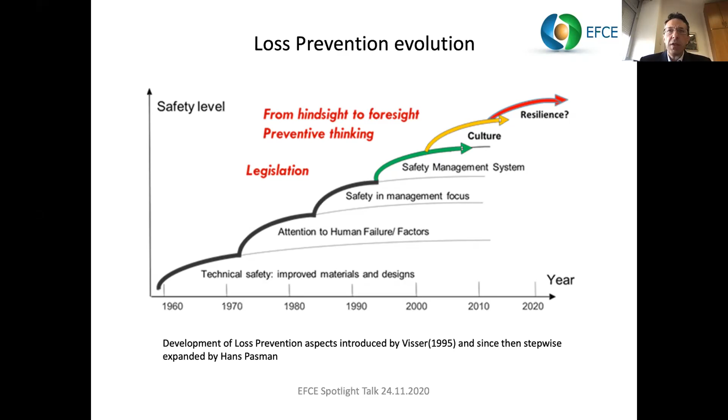This webinar with leading chemical experts focuses on safety, on what we call safety 4.0. Why? We see the fast development of manufacturing, processing, and chain production, which is well known as Industry 4.0, which includes the digital revolution, artificial intelligence, the Internet of Things, and the interaction with every smart device, opening new possibilities of data gathering and processing, applying the tools of artificial intelligence and machine learning.

Accordingly, new approaches are needed, to re-engineer process safety and the way technological risk should be managed towards the newly defined safety 4.0, introduced for the first time at the last EFCE Loss Prevention Symposium organized in Delft by Professor Genserik Reniers.

And from one side, emphasis is about identifying the benefits to the management of major hazards. From the other side, we must ensure that all the hazards of the technology are understood and correctly managed.

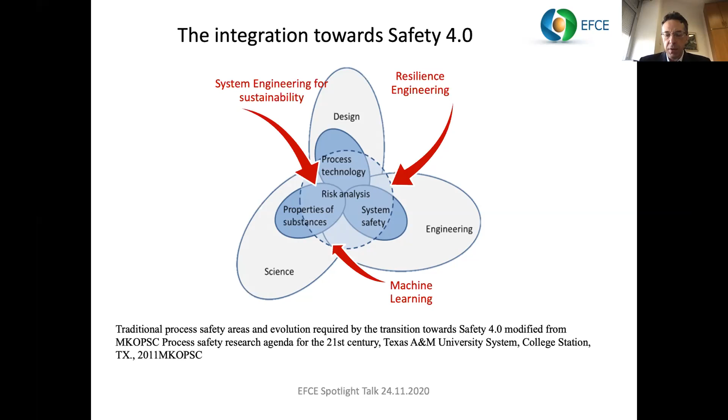On this basis, I mention the next Loss Prevention Working Symposium, which is the 17th of the series, and which will be organized in Prague. Some new topics will be introduced, also taking into account EFCE efforts to transmit the key messages relevant to energy transition, carbon-free and safe sustainable industry.

Here you can see quite fastly the matrix approach showing the new topics, the new challenges posed by the emerging problems, and the traditional topics of our symposium.

And I showed just some expansion of the different topics: risk assessment, security and safety, lessons learned, case studies, human and organizational factors, leadership and risk communication.

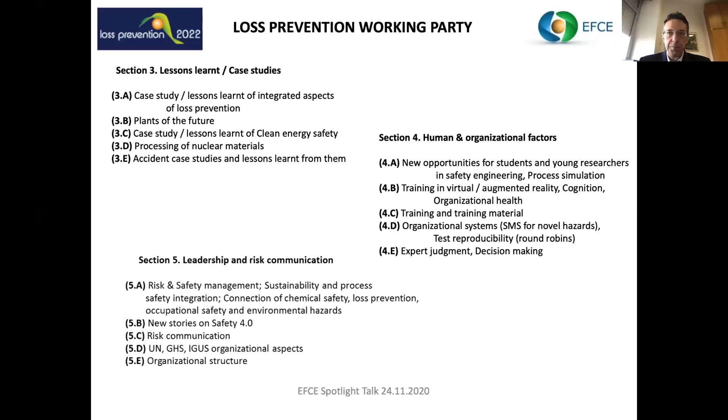But now, after this introduction, it's time to get this webinar off the ground, introducing the first speaker, who is actually a worldwide guru in process safety. I remind the audience that if there are some questions about the lecture, please write them by the electronic system, and we shall discuss them after the lecture.

The first speaker is Professor Hans Pasman, who is a research professor at Mary Kay O'Connor Process Safety Center at Texas A&M University and emeritus professor in chemical risk management of the Delft University of Technology. He investigated several process industry accidents, and his research included reactive materials, dust and energetic materials explosion, risk analysis. Since 1972, he is a member of the Working Party on Loss Prevention and Safety Promotion in the process industry, and is currently always with us.

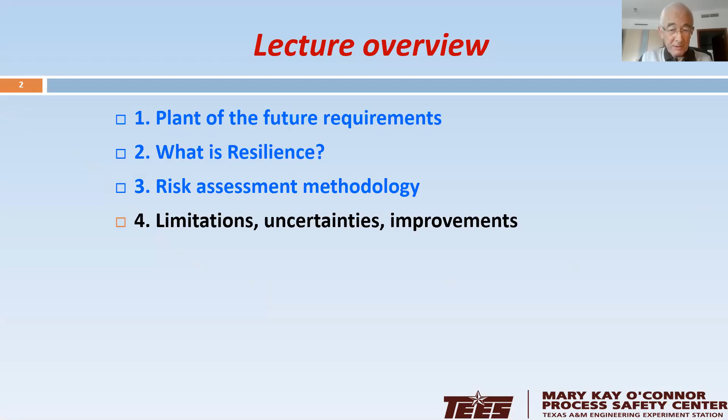The overview of the lecture is as follows: plant of the future requirements, what is resilience, risk assessment methodology (just a quickie), limitations, uncertainties and improvements, system approach, industrial application and business continuity, and conclusions on plant facility site resilience. And that is the whole story.

Now we start with plant of the future requirements. Maybe you come from all kinds of specialisms or very general backgrounds, so you have your own view on requirements, I'm sure. But just in a few dots: high product and energy efficiency, and flexible to change, because the dynamics in the world have greatly increased—markets, prices, requirements—everything changes. So you need flexible processes.

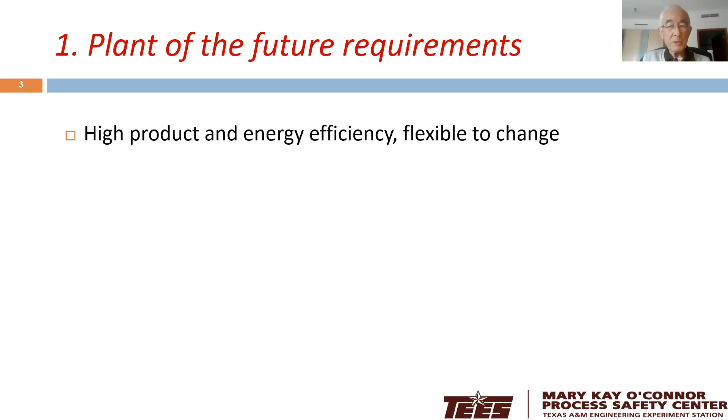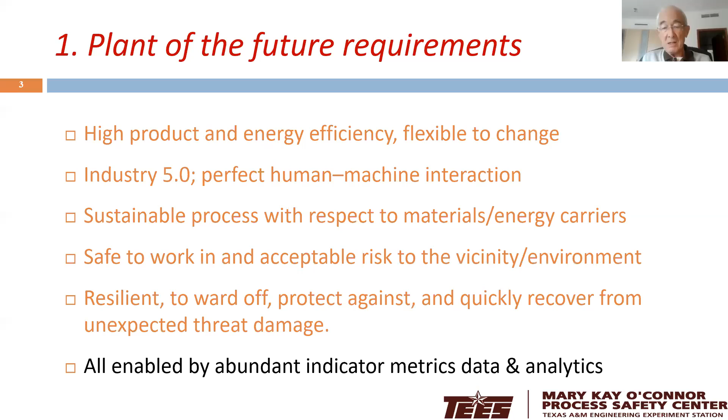In the long term, Industry 5—now we have Industry 4, but in the long term, Industry 5 is perfect human-machine interaction. Then sustainable process with respect to materials and energy carriers, safe to work in and acceptable with respect to risk in the vicinity and the environment, resilient—to ward off, protect against, and quickly recover from unexpected threat damage—and all enabled by abundant data and analytics.

Now, what disaster types can there be? The natural ones: think of high winds, tornadoes, flooding, earthquake, that kind of thing. Technological—you can have a release of flammables and an explosion, maybe a very heavy explosion with lots of damage. Environmental is more in toxicity aspects, and human-made is, of course, cyber attacks, terrorist attacks, sabotage—there will be a lecture on that today too.

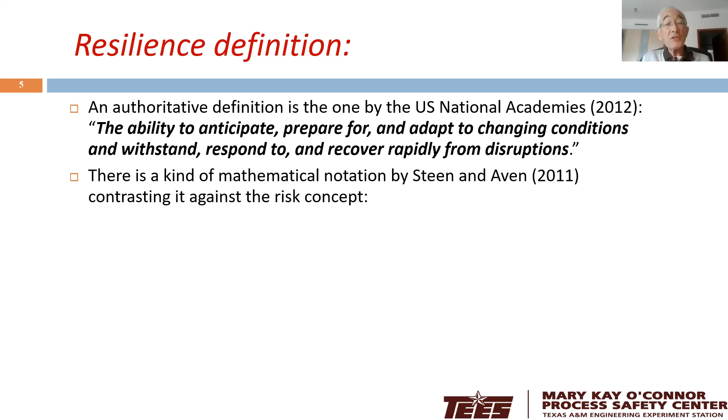There is also a kind of mathematical notation by Steen and Aven from Norway in 2011, contrasting it against the risk concept. The risk concept is a function of the type of attack, barriers, consequences, probabilities, uncertainties, and background knowledge.

A subset of that, vulnerability, looks at the targets that are attacked—so it is the barriers, consequences, probabilities, uncertainties, and knowledge given an attack. And the complement of that is robustness.

Resilience is broader in the sense that it is the same function of the barriers etc., but given any attack, including new types—because we are very bad as humanity at looking into the future.

The concept here is more comprehensive than the one by Hollnagel, Woods, and Leveson that was launched in 2005-2006 as resilience engineering. The word 'engineering' here is, in my view, a little bit confusing because it is not looking at the hardware of a plant, just the people.

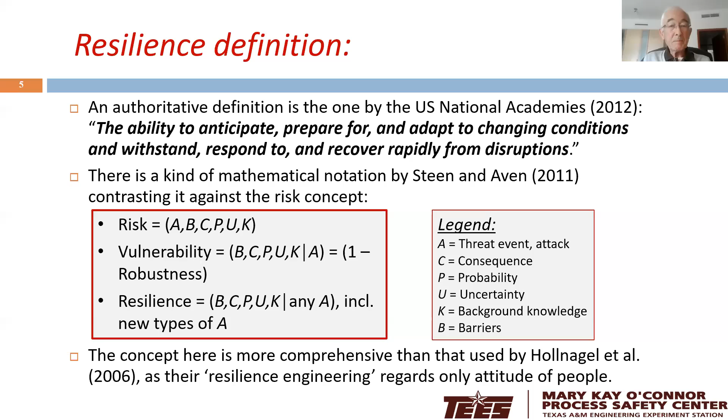I worked with two PhD students, and another one is coming, for almost ten years on this aspect of resilience. We developed this kind of quadrant, so to speak, that is inspired also by the work of Trevor Kletz on inherent safety.

Because everything starts with the design of your equipment, and inherently safer design is certainly part of it, but it should go a step further, namely error-tolerant design. This means the design of the equipment takes account of a human being—what capacity a human has, the time he needs to decide, etc. So it is human friendly.

Then next, if the operation is going, you should detect early warning signals—to be warned ahead of time and to avert any disturbance that otherwise may come.

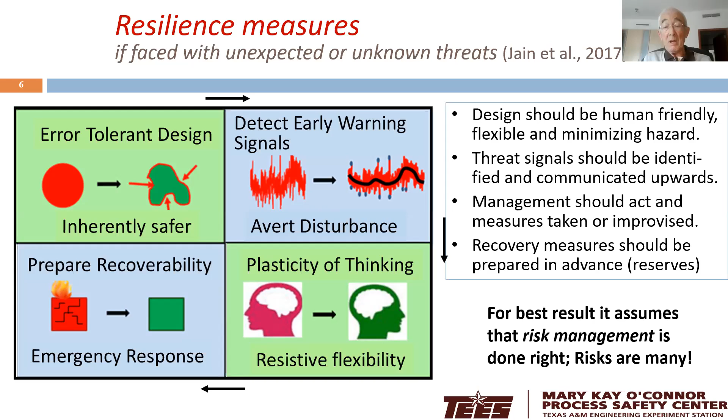For the best result, it assumes that you did your risk management right. Risks are many.

A very quick overview about risk assessment for those that are not confident with it. If you start, please first establish the context with the objectives, your stakeholders, criteria, and the key elements. That is very often not done.

Then identify the risk, and I highlighted that because that is most important, and it is the weakest part of the whole risk assessment. What can happen and how can it happen? Then analyze the risks, okay?

Consequences, likelihoods, and you get a certain level of the various risks. You evaluate them, rank them, and then treat them in the sense that you try to reduce them by selecting measures to minimize them, or at least make them acceptable.

The tools known in hazard identification are HAZOP and FMEA, that's hazard and operability studies and failure mode and effect analysis. Very old tools, already from the 60s and 70s. Are they reliable? Well, only to a certain extent. It depends very much on the quality of the team doing it. But even the best team can overlook certain hazards.

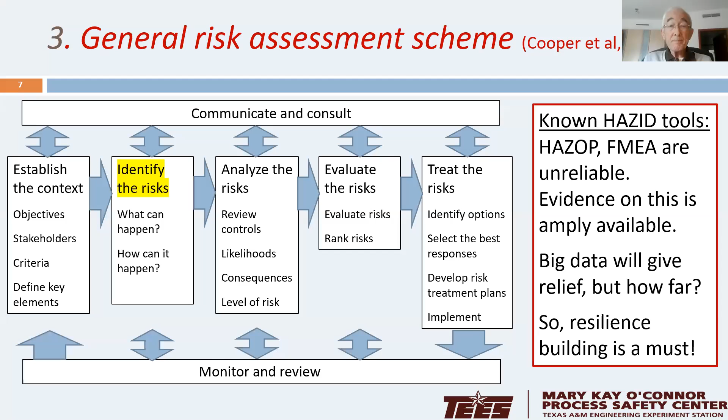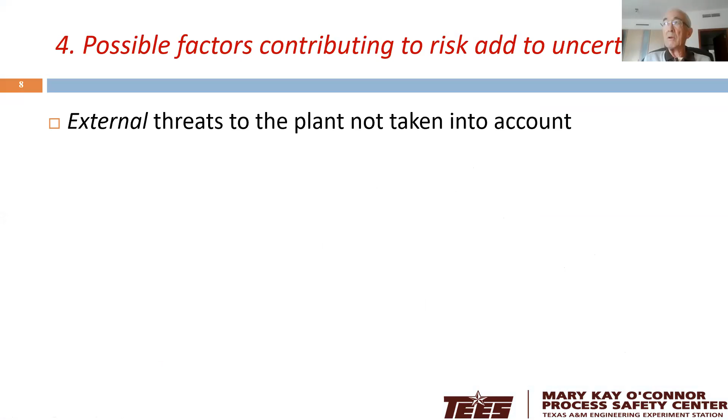So resilience building is a must, because that should protect. Possible factors that make the hazard identification so uncertain: external threats to the plant are usually not taken into account, although there is some trend there for improvement.

And then there are lots of internally contributing factors. Human failure is in many forms. For a long time, there was no human failure really accounted for in risk assessment, or very implicitly. There are always hidden things, also in design errors, functional and material, organizational factors, miscommunication, bureaucracy, all kinds of delays, hidden correlations and dependencies between components.

Only in the last 5 or 10 years has it become possible to deal with dependencies between components determining another failure. In risk analysis, there is lack of context definition and bad definition of the system, wrong interactions of correctly working elements that lead to non-linearity and dysfunction of the system. So everything looks all right, but still something goes wrong.

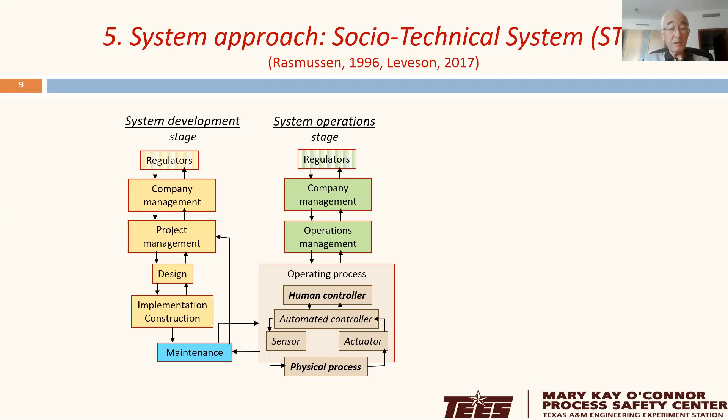And Nancy Leveson has added to that a pillar on the development stage, because there is already a lot of things happening, constraints that maybe just expose themselves in the operation stage. Maintenance is in between, because maintenance for a large part is determined by the development, but also by the operation. So the system is more than the sum of parts.

A complex system is the hierarchy of organizational levels, as I showed you, connected by information links. And complexity is not a system property. A lot of people always say the system is complex, but what they mean is our brain cannot see right away what is happening all in that system. So it is a limitation of the mind.

And safety is emergent. That is, it comes out. You cannot put your finger on it. It is emergent.

Okay, now with respect to resilience, from a company point of view, it all starts with leadership and culture, because the leader determines the culture, staff engagement, decision-making, that requires situation awareness, and of course also for measures, innovation and creativity.

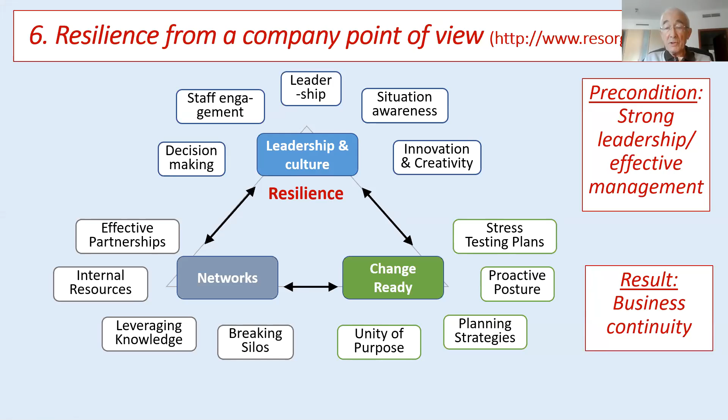So that requires effective partnerships, internal resources, leveraging knowledge, take the right conclusion, so to speak, and very important also, breaking silos in your own organization. The silos, what I mean is just the walls between organizational groups. So the precondition of all is strong leadership and effective management, and the result is business continuity.

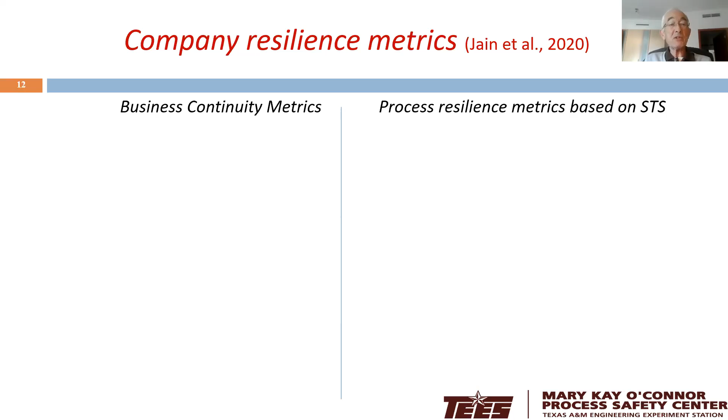Now, the resilience metrics. Prerna Jain, our second PhD student, now working for Exxon by the way, we developed a number of metrics. The metrics on business continuity are just literature ones, because there is a lot of resilience on business continuity, and that is business resumption response time, quite obvious, recovery time, recovery point objective, that is the maximum amount of data loss that should be occurring during the disaster, return time objectives, and maximum tolerable period of disruption, more or less the same.

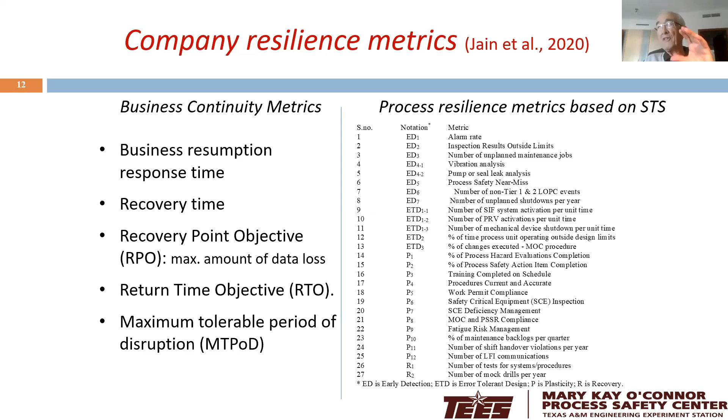Now, the resilience metrics for the process of the plant, that are many, based on the socio-technical system. So it is part people and in part the hardware, and those are things that you can measure. So you can take periodically an observation of their numerals and look at that for a longer time. So it is kind of leading indicators to a certain extent, but more directed towards resilience.

First, we need data. That is the plant, people, and procedures. Then, of course, as far as possible, the hazard identification, process historical operational data, the resilience metrics that you have monitored, the safety management system metrics, that is the lagging and leading ones, and then the maintenance, so what is coming out of the maintenance management system.

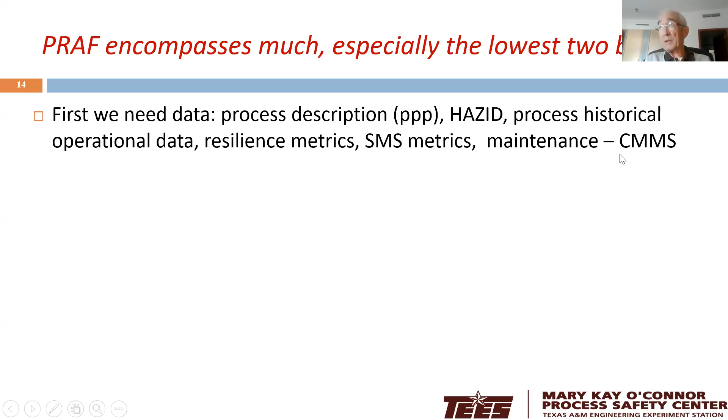Various methods of statistical data analysis and natural language processing are required to sift out early warning signals, especially the process upset ones. And that is today with digital twin models, where you can also study the dynamics. And with respect to people, congruence analysis, where you can analyze the dependencies of tasks of one human with respect to the other, and of course also the possible failures.

Then machine learning and artificial intelligence provide the many data reading interpretation possibilities to obtain prediction of threats and risks, including uncertainty analysis. The result is pattern recognition, random forest decision tree, and hierarchical Bayesian analysis. A lot of details.

Okay, then a definition of measures to survive and recover and strengthen resilience, and what is in the selection the best cost benefit.

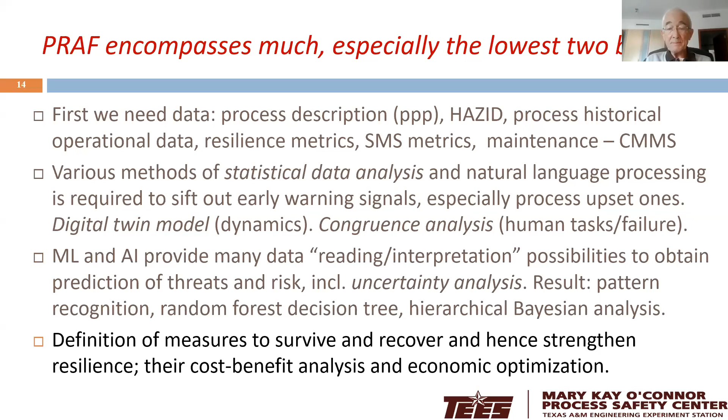What is at risk? And what measures one can take. At risk is the human base, your people, the market share, facilities and equipment, not to forget your reputation. We know it all, okay?

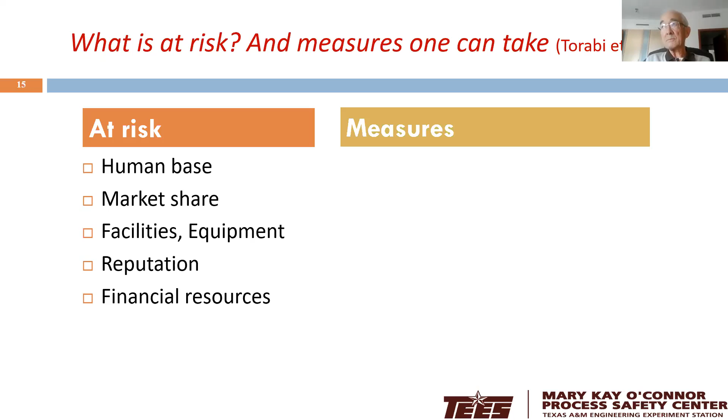Well, I will not give any examples here, but there are quite a few to mention: financial resources, somehow you need reserves. Intelligence is very important, that is, of course, in connection with the early warning. Cybersecurity, effective emergency response in the plant and in the region. Because very much as you have a big disaster, you need response teams from various parts of the country or even from neighboring cities or whatever, and that has to be trained. Building contingencies reserves.

Okay, there are ways to optimize cost of risk reduction versus the reduction of the risk. Think of a Pareto kind of curve with the risk acceptance level here, and the best point there. And of course, you can do that in an overall thing. So with all the data that you have, your risk analysis, your resilience analysis, you can also look at the economic optimization and profitability.

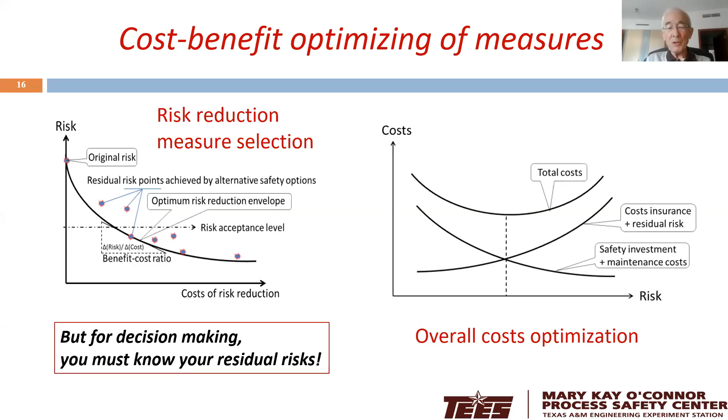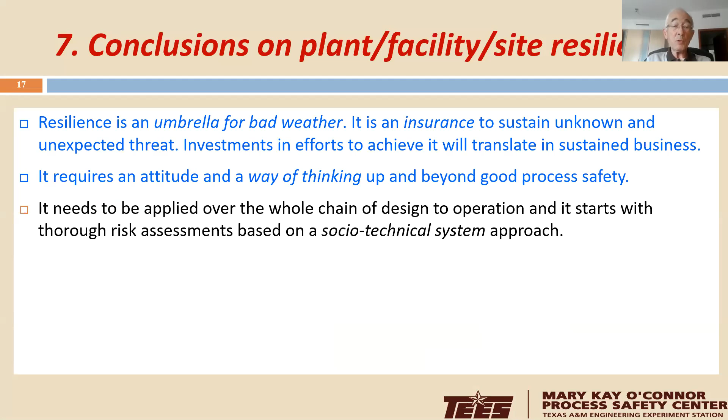So my conclusions are: resilience is an umbrella for bad weather. It is an insurance to sustain unknown and unexpected threats. Investments in efforts to achieve it will translate into sustained business. It requires an attitude and a way of thinking, up and beyond good process safety. It needs to be applied over the whole chain from design to operation, and it starts with thorough risk assessments based on the socio-technical system approach.

Big data is around the corner. It will help in many ways to obtain information and hence knowledge of sneaky downward trends in performance and complex interactions. Process models, indicator data, and machine learning will help to obtain early warning signals, enabling improved maintenance, reliability, safety, product quality, and process dynamic adaptation.

Thank you very much, Hans, for your illuminating and new message. I'm sure that all the attendants got your message loud and clear regarding the actual challenges connected to resilience engineering and the system approach. I remember a long journey was made since you presented for the first time resilience in our community at the Florence symposium. So very nice.

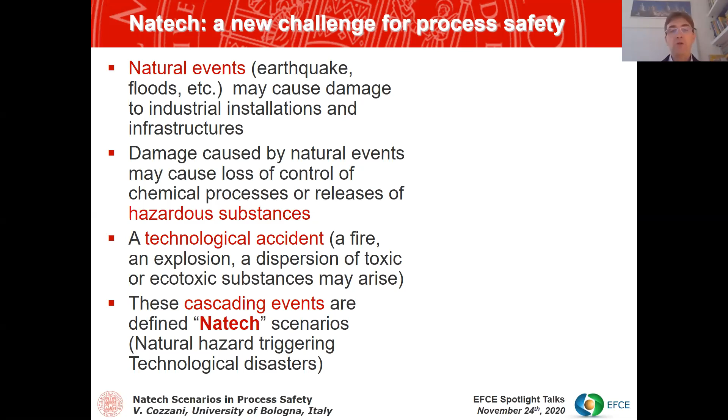Okay, so Natech scenarios are a quite specific issue concerning and affecting the chemical industry. They are actually composite scenarios in which natural events are expected to impact on industrial facilities to cause loss of control or structural damage, resulting in the release of hazardous substances, generating a technological accident. What is specific of these Natech events is that they are cascading events, in which a natural event generates a technological scenario, and the consequences of both events may impact on the assets, on the workers, on the nearby population, and on the environment. So it's mostly this cascading feature that is the more alarming aspect of this peculiar type of accident.

Let's see an example. It's a very well-known accident that took place in 2017 in Texas after the impact of Hurricane Harvey on the south coast of the Gulf of Mexico. The facility involved was a site of Arkema, an international chemical company that produces peroxides as initiators for polymeric reactions. On the 26th of August, the Arkema site in Crosby, Texas, was shut down due to the approach of the hurricane.

Then, a few days after, on August 28th, a flood reached the plant and caused a power outage. At the same time, backup generators were submerged, so there was no backup power supply. This resulted in the stop of the refrigeration units for the peroxides, which could not be refrigerated and could not be driven away due to the flooding of the main roads connecting the site to the escape routes in the safe direction. So there was no way to avoid the peroxide gradually heating up to ambient temperature.

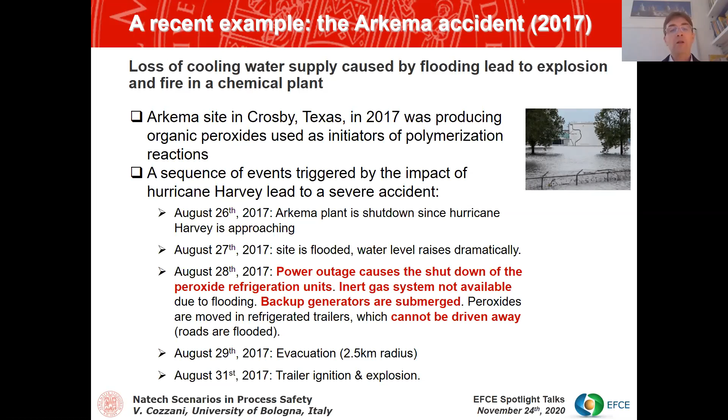This happened three days later, on August 31st, when suddenly the peroxide began to decompose and caused repeated explosions. The peroxide, tertbutyl hydroperoxide, involved in the accident has a low flash point and experiences violent self-decomposition. The result of the event was huge explosions and release of toxic fumes that forced an evacuation of the resident population in a radius of about 1.5 miles around the site.

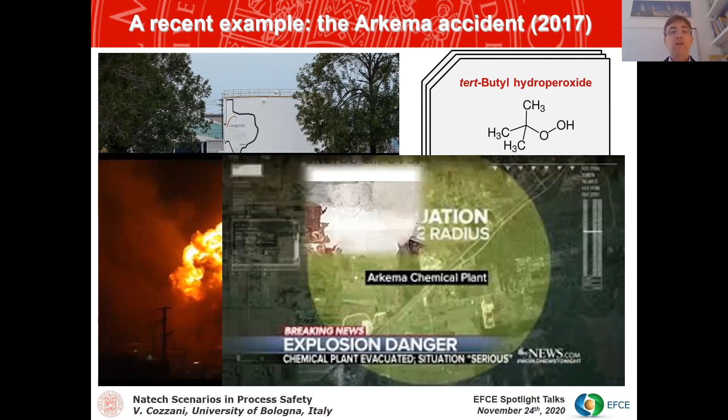Now, what caused the main hazard to the workers and the population? By the way, policemen governing the evacuation were badly affected by the toxic fumes. So what caused the harm was the technological scenario, the decomposition of peroxides and the following explosion. But what really started the chain of events was the flood, even if the flood was slow and gradually affected the site so that no worker was affected by the starting event. But now this is a kind of paradox: how can this be a new challenge for process safety, since it's a kind of combination of two well-known hazards?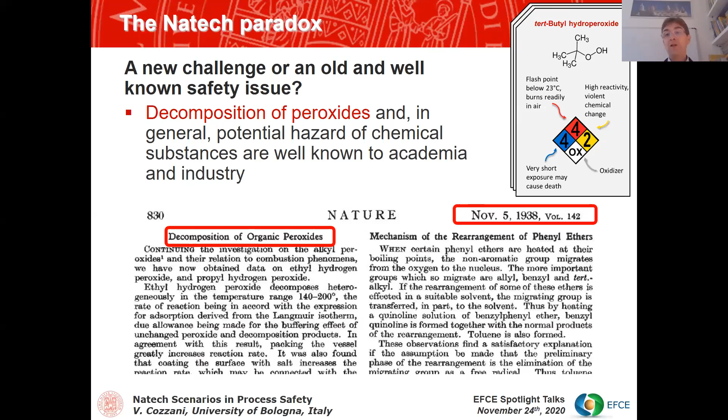At the same time, the hazard due to peroxides, maybe more recent, is still well known and widely investigated. Here I collected a paper in Nature dated back to 1938, where the hazard of peroxide is cited and analyzed here in Europe. So both the technological accident that took place at the Arkema site and the natural event that affected the site are well-known hazards.

But still, how can it be that these two well-known hazards resulted in an accident on the one hand, and on the other are a kind of new challenge for process safety and for the chemical industry in general?

The point is that what took place at the Arkema site is a combination of the two events, more precisely a cascading event. That means first there was a flood, and then, due to a number of unforeseen consequences of the flood, a technological accident spread out. So what happened was that a facility we can consider safe from the point of view of conventional process failures was actually found unsafe when external hazard causes played a role, as with the natural event. And this is a first point.

A second point is that Natech events are what we call high impact, low probability events. That means they're events with a time of return or a frequency that, luckily enough, is low, so that it falls outside the everyday experience of operators and facility managers.

A third point is the complexity. The chain of events in Natech accidents is usually quite complex, and it's not easy to understand what may actually happen and how the accident may evolve. This was the case at Arkema, where four safety barriers, four layers of safety barriers considered to be independent, and which actually were independent in normal conditions, revealed a common cause of failure.

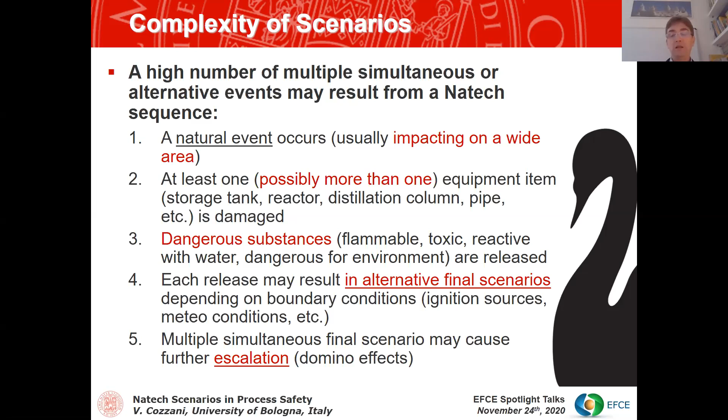A further point to remark concerns the feature we already mentioned of Natech as having a high impact and a low probability. This means these events fall outside the experience of risk managers and are deemed not credible, which hinders appropriate resources from being dedicated to their assessment.

What happens with Natech? What you see here is an ideal plot in which, on the y-axis you have frequency, and on the x-axis you have magnitude. On such a plot, you can track an isorisk curve, where you keep constant the product of frequency by magnitude.

Usually, everyday experience deals with conventional risks. Conventional risks are not specific to a particular activity or site—they are accidents that may affect any type of site. Just to give some examples: workers entering equipment where there are hazardous substances that have not been properly purged, or accidents due to the release of loads from a crane, and so on.

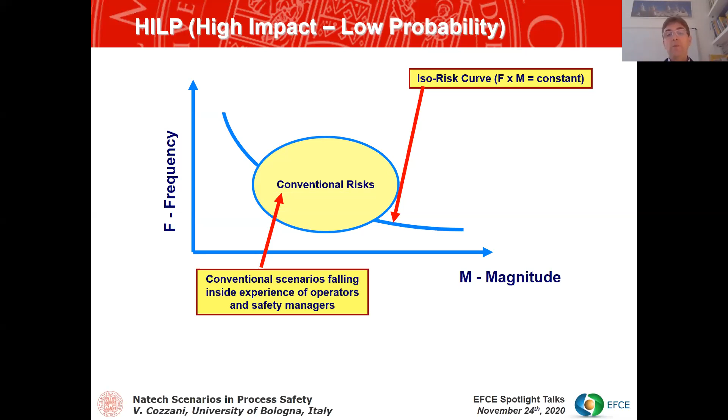All this is in our everyday experience, unfortunately, and these types of accidents are those effectively tackled by conventional risk management systems. While when you deal with Natech events, you're in the region of the curve where the frequency is low and the magnitude is high. It's the region where the accidents are in the domain of experience of academic conferences, like this one today, or of very experienced practitioners that are not frequently in charge of conventional risk assessment procedures. This makes it more difficult for identification.

So that's why in the case of Natech events, the challenge of appropriate identification is something that is in part still to be explored.

We can consider that all process facilities in the chemical industry have on site an appropriate risk assessment and risk management system that is designed to avoid the possibility of accidents through a number of barriers.

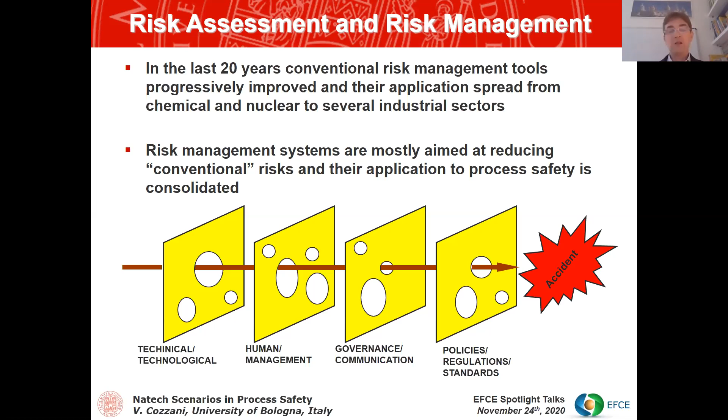Still, this type of risk assessment and management system is designed to operate contrasting accident causes in ordinary conditions. That means it is seldom done to test these barriers and systems immediately after an earthquake or during a flood. This means that the risk management system may be affected during Natech accidents by the very particular and specific conditions that take place during the accident.

This is the reason why, even if risk assessment and risk management are standard procedures, their extension to tackle Natech events is quite recent.

Most of the work done in the quantitative assessment of Natech started in the last decade and produced results—the first published paper is from 2007. This is due to the fact that before, it was not recognized that after an appropriate design of the facility to be safe with respect to earthquakes, floods, and so on, there was still a residual risk that needed to be managed to avoid technological accidents being caused by Natech events.

As I told you, in the last decade there has been a lot of work on the topic that allowed setting up a framework for the quantification of risk due to Natech events, based on a few specific tools that integrate ordinary quantitative risk assessment procedures, either conventional ones or new approaches such as those based on Bayesian networks.

These points concern the availability of a simplified description of the expected time of return and intensity of natural events that may affect a site, and the availability of models for the vulnerability of equipment.

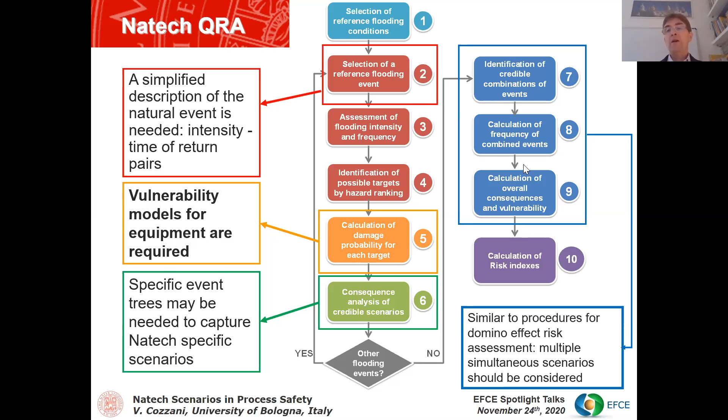This framework simply didn't exist 10 years ago, and since then there has been a lot of multidisciplinary work carried out—for example, in developing what can be called key enabling models to afford the assessment of Natech, models trying to capture the potential causes of releases of hazardous substances from process equipment in the case of natural events.

When you aim at carrying out a quantitative assessment on an extended facility, you need, at least in a preliminary step, this type of simplified model to carry out a screening in order to identify the critical items that are more prone to fail in the case of the action of a natural event.

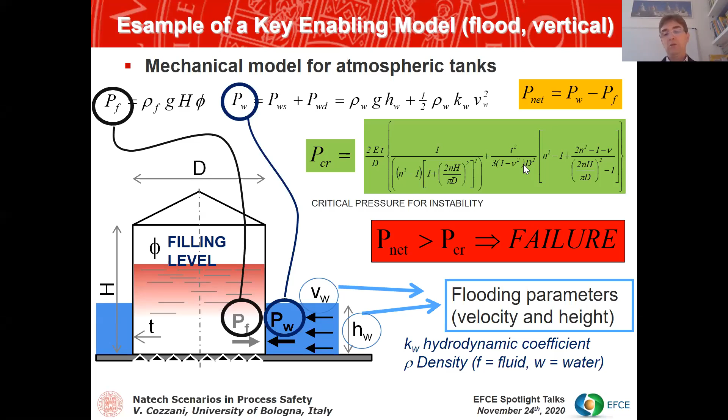There has been a lot of work from the academic community in order to understand this point. A further point that was made possible by the early framework for quantitative assessment was to understand how the risk due to Natech events may change the overall risk figures in a facility.

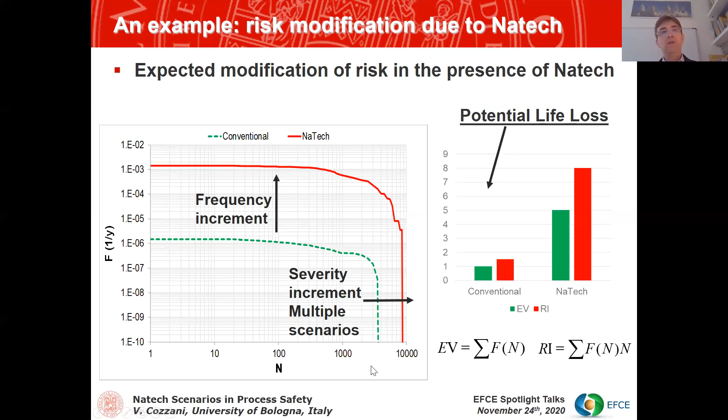This is even exacerbated when you consider that the increase will affect accidents with a high number of fatalities, due to the wider impact area of technological events. This means that if you go to the expectation value and to the perception of risk, the perception of accidents with a high number of expected fatalities is usually higher. That means you are increasing the risk in a region where regulatory authorities would rather ask you to reduce or even eliminate the possibility of such scenarios.

It is important to consider if safety barriers can have a role in limiting the risk due to Natech events. Safety barriers are used to control this type of risk, to control technological risk in process facilities.

However, in the Arkema accident, four barriers failed. The ordinary power supply for refrigeration, the subsidiary generators, the possibility to move away the peroxides, the refrigerated containers - all these barriers were not independent and all were found to have a common failure mode in the case of a flood.

Unfortunately, this feature of the Arkema accident was found not to be the only one. A number of accidents were recorded where the failure of safety barriers due to the natural event actually had a role in exacerbating the consequences of the Natech events. So the failure or the performance modification of safety barriers is expected to play a negative role in the case of Natech events.

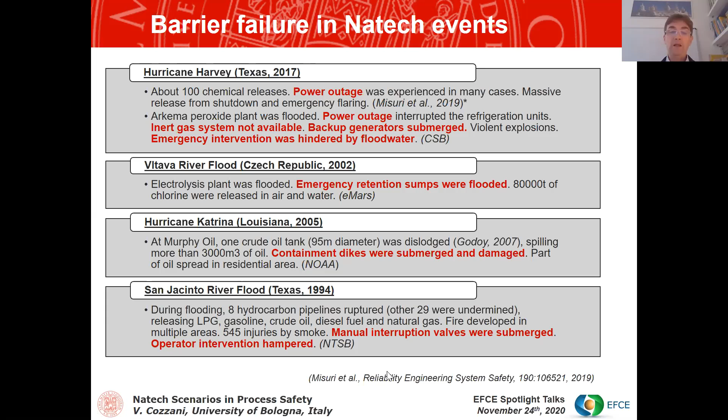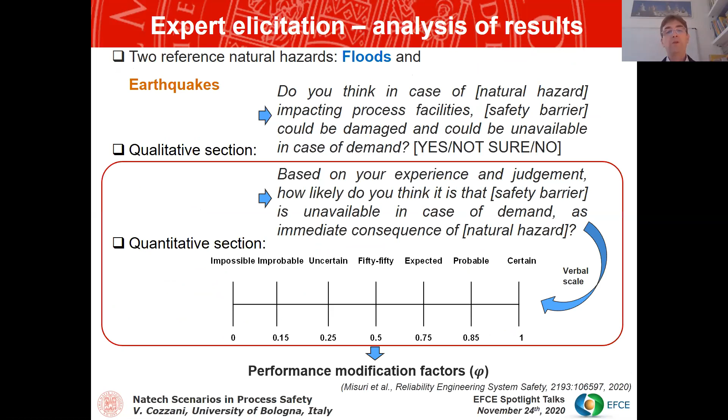A framework, the original framework for Natech, can be modified to include the effect of barriers, and this is what was done in a recent work, where a performance modification factor was investigated by a survey involving experts. This expert survey transformed verbal answers from experts onto a probability scale, used to define a barrier performance modification factor applied to modify the probability of failure on demand and the effectiveness of active barriers, as well as the effectiveness of the action of passive barriers.

Here you can see how this performance modification factor was estimated from the expert survey that was carried out, and you see a strong reduction in the effectiveness of some barriers - F stands for flood and E stands for earthquake. You can see that values as low as 0.15 can be obtained from this type of assessment. So some barriers are actually not effective or should not be considered present during Natech events.

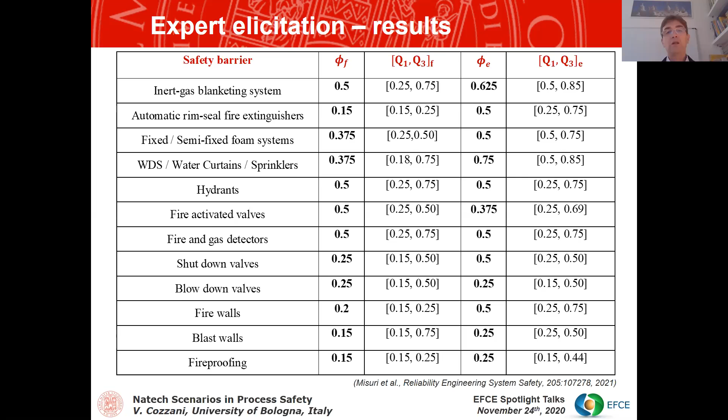When including this in quantitative assessment by an appropriate event tree analysis, it is possible to calculate the modified risk figures.

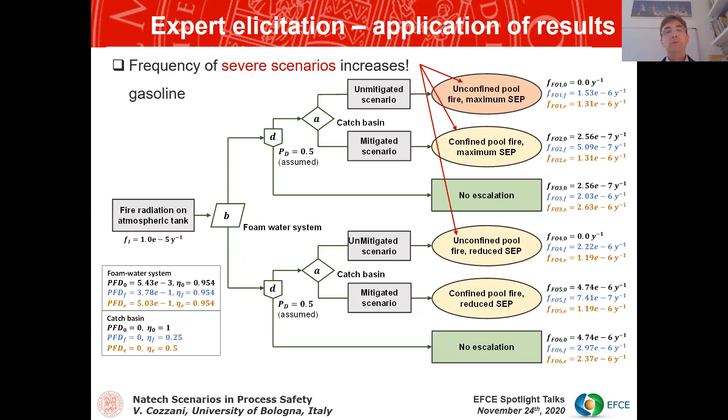And here you have the final results. This is the standard case where barriers are considered in the analysis, showing the probability of unmitigated scenarios, where there is no mitigation from safety barriers. When considering earthquakes or floods, you see that the probability of unmitigated scenarios may increase by about 3 orders of magnitude because the barriers can be hindered by the event.

With this recent result, I can come to some conclusions. Even if they are a combination of well-known hazards, Natech events are high-impact, low-probability events that need to be considered in safety assessment and process safety. What is more important is that, differently from conventional accidents, the safety barrier performance may become critical and much lower than expected due to the simultaneous impact of the natural event. The resilience of safety barriers and the independence of protection layers is thus an additional issue that should be considered when analyzing Natech events.

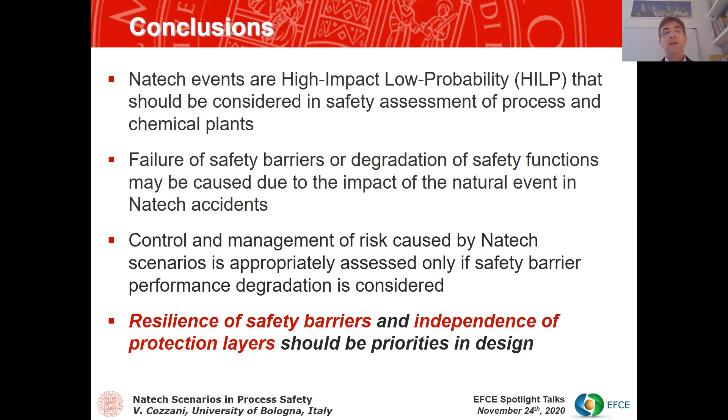That's all. I only have to give some acknowledgements to all my co-workers, and in particular to Alessio Misuri, a brilliant PhD student who helped me obtain some of the results I have presented to you. So thank you for your attention.

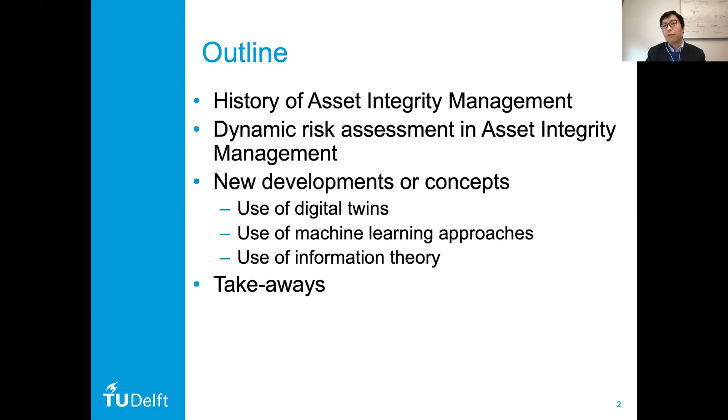In the next 20 or 25 minutes, I will briefly introduce the history of asset integrity management, and talk about how we can handle risk in asset integrity management and what we should do, along with some new concepts and developments, for example use of the digital twin, use of machine learning approaches, and I will try to link the machine learning approaches to information theory. Afterward, I will give you a few brief takeaways through the presentation.

A little bit more about the history of asset integrity management. We know that in the 40s, the earliest known approach in maintenance or inspection was breakdown maintenance. Up to the 40s, maintenance cost was considered an inevitable cost, and the only maintenance carried out was breakdown maintenance. This was feasible at the time because there were a limited number of components in the system, meaning the system was not that complex.

Then later we saw a rapid growth of complex systems brought by the Industrial Revolution, so breakdown maintenance may not be that cost effective. In the 60s, detection of the degradation of a specific component in the system was used to minimize breakdown - this is what we call preventive maintenance. In this maintenance strategy, degrading components were replaced either under an age replacement policy or a block replacement policy - basically the device is replaced upon failure or at a certain period of time or interval.

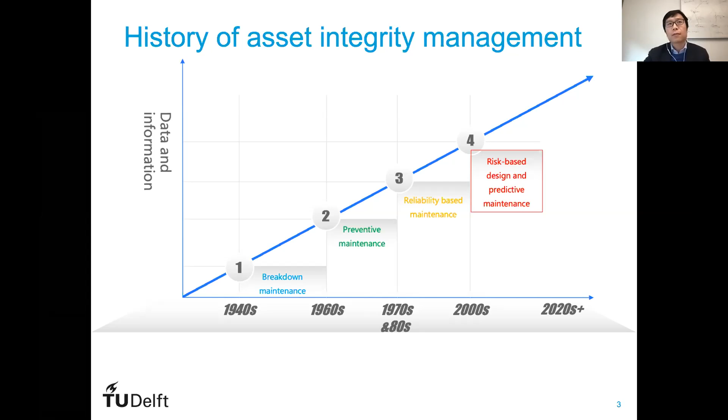Moving to the 2020s, you will see some of the new development of the so-called real-time condition monitoring-based maintenance planning. It is a sensor-based monitoring technique which aims to enhance the productivity of the system, operation, asset integrity, and also the process safety. These data generated through the condition monitoring process can be utilized to assess the fitness for service, and also can be used to optimize the risk-based inspection frequencies, the maintenance resources, as well as the extension of the lifetime of the process system.

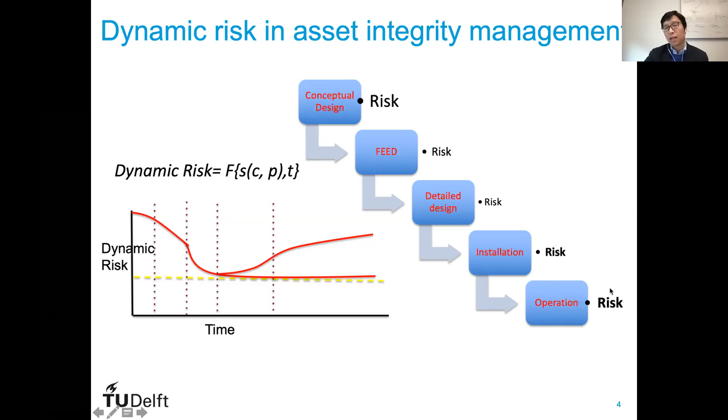That is actually a brief history of asset integrity management. When we move to the new era of conditional-based asset integrity management, I would say that the risk must be treated in a dynamic manner, because we are actually dealing with operational data. Considering the material degradations, the change in the external environment, the human operators' attitude or whatever, this must be treated as a time function. So how can we dynamically assess the risk?

This is not a new concept. It was a concept proposed, I think, back 10 years ago. Basically, we started with a selection of the unit or asset that we want to study first, to do the risk assessment. So once the unit or the asset is selected, then we will find the most credible failure scenarios or accident scenarios.

Based on the given accident scenarios, we do a consequence assessment according to different types or categories of the losses, and ideally these losses should also be assessed dynamically. Based on the design stage data, we can also assess the prior probability of failures of the asset or the process unit.

And then based on the real-time process data, the real-time condition monitoring data related to that asset or system, we can keep updating the prior probability of failures and try to get the posterior probability of failures. So eventually, we can assess the risk in a dynamic manner. This is how, I guess, we should handle the risk in nowadays asset integrity management.

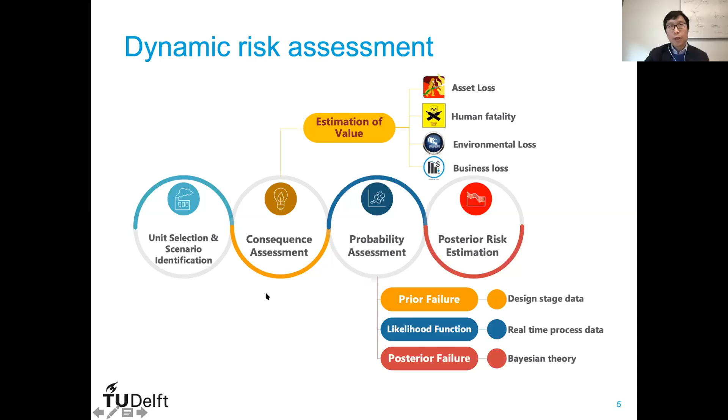The data pertaining to these progressive defects or process deviations are also collected using probably multiple sensors, such as the corrosion probes, the inline inspection, the PIGs, and also the fiber optic cable sensors. Then you will also try to collect the defect data, which may include the corrosion, cracking, dents, strains, etc. So with the combination of the process deviation or process data, you are able to predict the probability of failures.

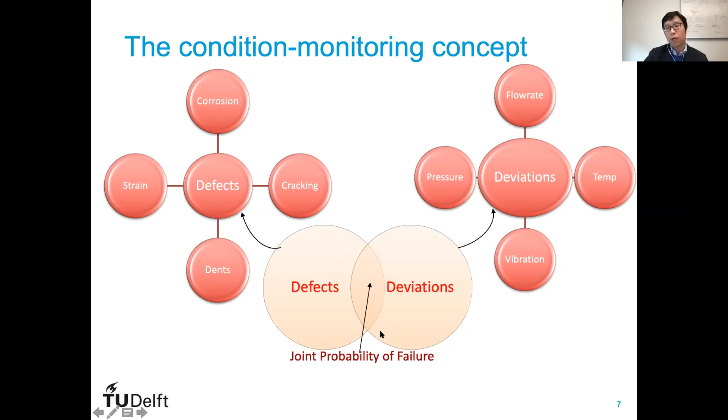So basically we monitor two groups of data parameters. One is related to asset integrity and defects, and the other is related to process deviations or process variables. So when we predict the probability of failure, we're looking into the joint probability of failure of these two different groups of parameters.

So following these steps, you will be able to optimize the inspection interval, and also do something to enhance or extend the life cycle of the asset. So that's some of the conceptual models that we developed before related to asset integrity management based on condition monitoring data.

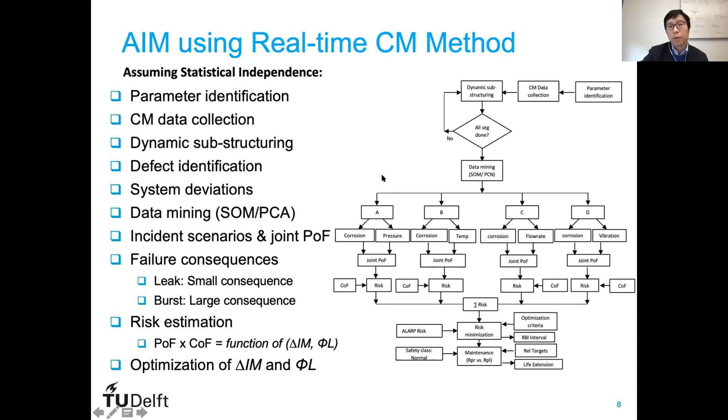So we all know that these days we talk a lot about the digital twin. With the emergence of Industry 4.0, the process industry is also now considering a wide range of digital technology that we can use to enhance productivity, efficiency, and safety of operations, aiming to minimize capital and operating costs, and also minimize the HSE risks in a chemical plant life cycle.

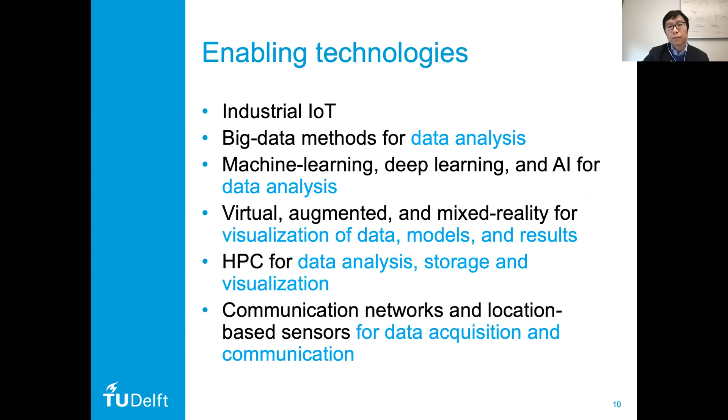So some recent studies show that the most popular application area of the digital twin is actually asset monitoring and maintenance. People are actually very optimistic about the application of the digital twin in asset integrity management in the process industry. So there are opportunities and also challenges.

So the digital twin can acquire data for asset performance management in real time. And this assessment will include the structural integrity level of the assets, the potential failure modes and rates, and also probably the requirement for repairs and replacement.

The digital twin can also provide a single interface for visualization of the risks, and also the key performance indicators of the assets. So operators can now use these insights and indicators to optimize the assets, and can also optimize the plans for intervention for repairs and replacement, and also maybe perform what-if simulation scenarios to enhance production while also reducing downtime.

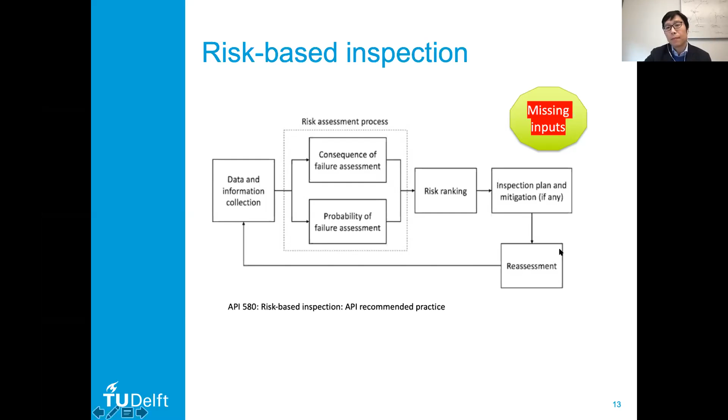So we have done a very straightforward, brief application of machine learning approaches to identify the key material failure modes of process facilities, for example when we encounter sample components with missing input on the design, and also other inspection parameters.

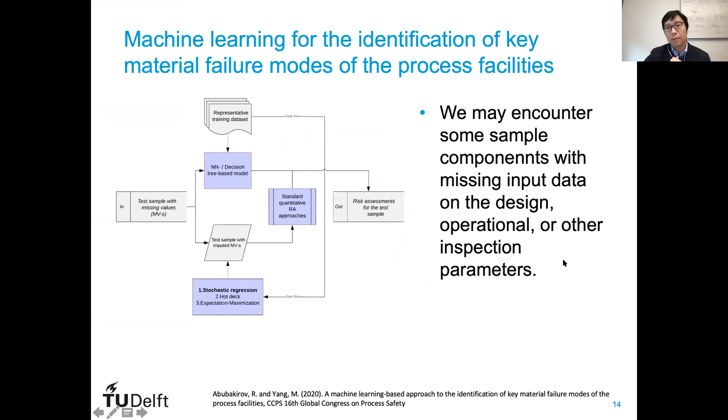The results show that the approach's performance in risk matrix prediction is again very highly dependent on the model's training data quality, and also what we call the bias-variance characteristic of the models used, or the features that we selected to train the model.

This figure shows a hierarchical risk value chart for each of the damage mechanism failure modes, based on which we can trace back to see which is the most critical failure mode. It doesn't matter which model you choose or how much data you have, the model performance is very highly dependent on the training data quality, and also the features chosen to predict the optimal parameters.

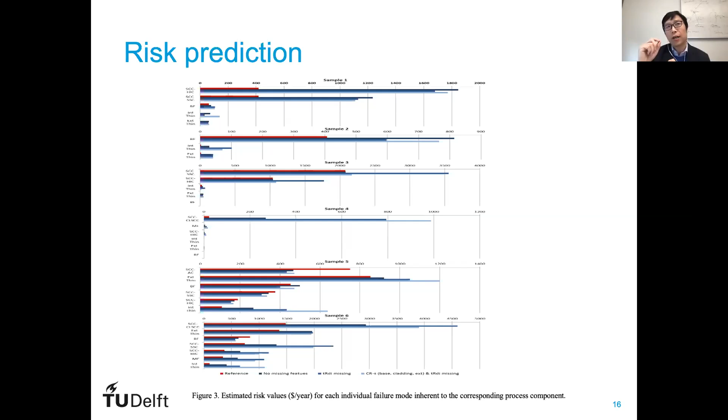So the problem now is that we should go back to see how information theory can provide insights or implications for the development of machine learning approaches for asset integrity assessment. Let's say the problem is this: when we have the data D, and we have the knowledge, which is the current model we have, and we try to develop a new model, something we need to determine is whether this model is a good model or not, whether it can provide a full spectrum of information about the real system or real physical system, or not.

In the absolute majority of cases, I think the answer is no. So what we're trying to do is reduce the uncertainty of the model, which, in the language of information theory, means we should reduce the entropy of this model. In a nutshell, the probability of the model, let's say a probability failure model, is definitely a knowledge-dependent variable, representing our belief in the failures at the present moment. Then addition of new data can be used to update the model and try to reduce the entropy of the model.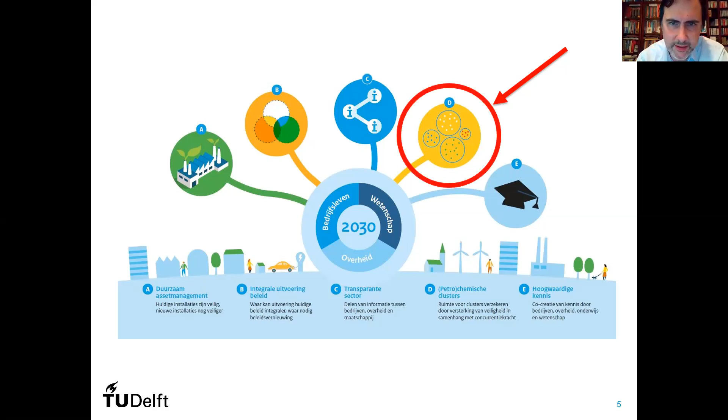This has some implications, which I won't explain myself since there are many books on it. In the Netherlands, we have an initiative by the government together with industry and academia that started five years ago. Five roadmaps were created to talk about the safety of the future, and one was about clusters and what it means from a safety and security point of view to have a cluster instead of a standalone company. The others were process safety education and knowledge, the importance of transparency for process safety, improving legislation on process safety, and, as we saw from the previous presentation, sustainable asset management. In this talk, we're going to discuss what it means to be clustered from a safety point of view.

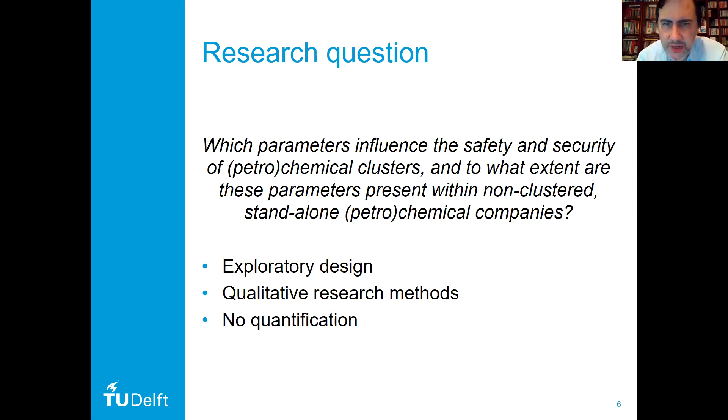We did an exploratory research using a multi-method design, but all qualitative, so we did not do any quantification yet. At present there's a follow-up research ongoing that involves more quantification of the parameters. But the research question of this study is: what are the parameters that influence safety and security in petrochemical clusters—thinking about process safety and process security, which are of most importance—and to what extent are these parameters present within non-clustered, standalone chemical companies versus clustered companies?

As I said, it was qualitative research: a literature study, 67 interviews with people mostly from industry, but also academia, and especially government organizations like environmental inspection services and safety inspection services. All kinds of relevant documents were investigated, not only scientific papers but also relevant documents within the Netherlands provided by experts of all kinds. A questionnaire was also conducted with inspection services.

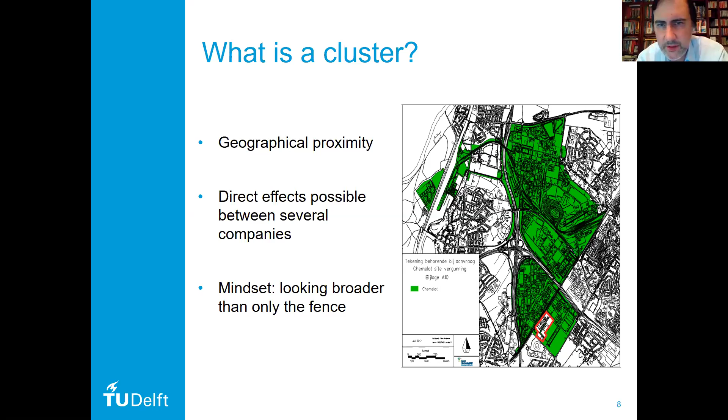First, we defined a cluster: plants in each other's vicinity, so there has to be geographical proximity—not necessarily that domino effects, as I'll discuss later, should be possible between them. There is geographical proximity where there is some kind of influence from one company to another. The mindset of the cluster is to look broader than just the fence, and also broader than just the legislation—the European Seveso legislation, which only covers establishments where domino effects are possible between them.

Now, one question is what are the differences between clusters and standalone companies with respect to accident scenarios. If you use the bow tie as a metaphor and look at the preventive, proactive side, they are the same. The hazards are flammable substances—we're dealing with dangerous chemicals—so flammability, explosivity, and toxicity are the hazards in both standalone and clustered companies. The central events would be fire to some extent, explosion, and toxic clouds.

Of course, there will be differences in the consequences between standalone companies and cluster companies. In a standalone company, you have the regular damage within the company, damage outside the company due to an accident—for example to residential areas and buildings—and escalation effects.

I will explain the difference between an escalation effect and a domino effect. In a cluster, you have the same risks, but also the possibility of damage to adjacent companies, leading to different kinds of losses, as well as domino effects and chain effects.

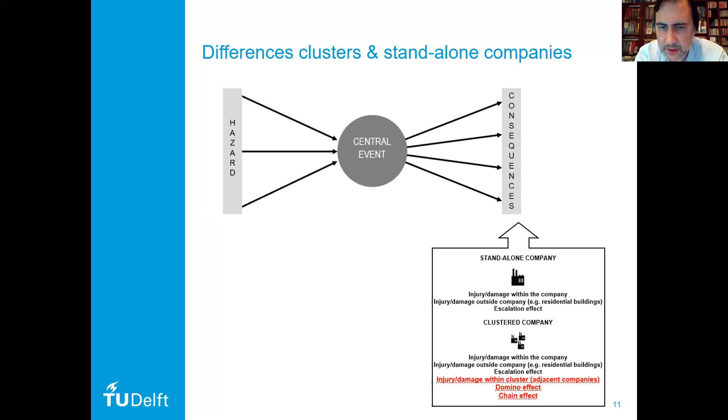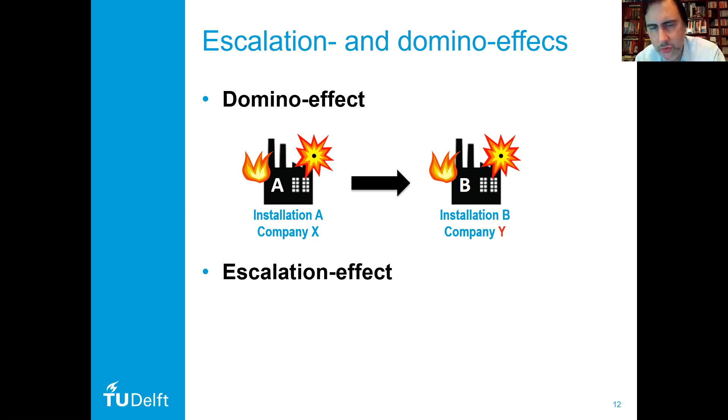The difference between escalation effects and domino effects: a domino effect is between two companies, company X and company Y, from one installation to another between two companies, using the definition from the Seveso legislation. The escalation effect is within an installation, within a company.

So you can have a domino effect inside a company, sometimes called in scientific literature an internal domino effect. We call it an escalation effect to make the distinction clear. The domino effect is an external domino effect.

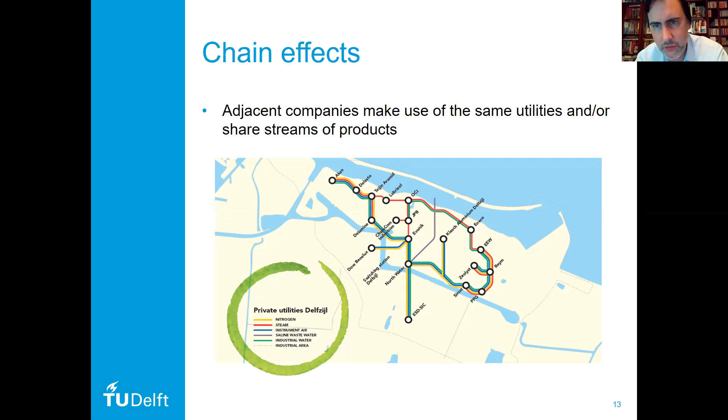Besides domino effects between companies and escalation effects, the knock-on effects within companies, you also have chain effects. These are accidents that happen because companies in a geographically situated cluster, in each other's vicinity, make use of the same utilities or the same streams of products. There can be a problem with utility from one company to another, or with raw materials from one company to another. This can cause a major accident, which we call a chain effect.

Now we know there are domino effects, escalation effects, and chain effects. What are the influencing safety parameters in clusters, if we talk about prevention and mitigation?

This is really in a nutshell, since I already made a brief summary of the results. First of all, there is the parameter of cooperation and knowledge sharing. It leads to reducing costs and to higher quality and professionalism of safety measures, in principle, if you can take the best of good practices from each other. But there are lots of challenges.

Thinking about the results from the interviews we held, there are many challenges. For example, a cluster usually doesn't originate from one company that was divided into several over the years, but rather a company was there and another company came next to it, and so on.

So it can be a challenge because all these companies have their own mother company and their own way of doing things with respect to safety, which is good, but may be a problem if you really want to cooperate and coordinate on safety. There is not much integration sometimes, and if interdependencies are not there in the cluster, it's more difficult to cooperate and share knowledge.

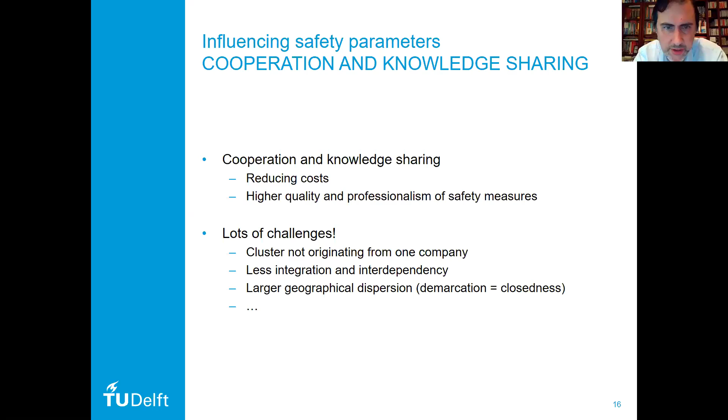There are other challenges besides these. Exchanging information on accident scenarios is actually demanded in Europe by the Seveso legislation, at least for domino effects. This is really an influencing safety parameter for clusters.

The Seveso legislation requires an exchange of information regarding accident scenarios if you are an establishment with domino designation—you're obliged to do that. You can also do this for other accident scenarios, not just domino ones.

If you have multiple companies that together form one establishment, which is sometimes the case, then there is no obligation—although you have multiple companies with multiple top management and multiple policies with respect to everything. You're really different companies, but one establishment, so there's no obligation, which is not really logical.

Effects are possible without domino designation between companies and between non-Seveso companies. If you're a risk-relevant company, not a Seveso company but still having lots of dangerous goods, just below the threshold, you can be subject to another company or a danger to another company. Effects are possible in between.

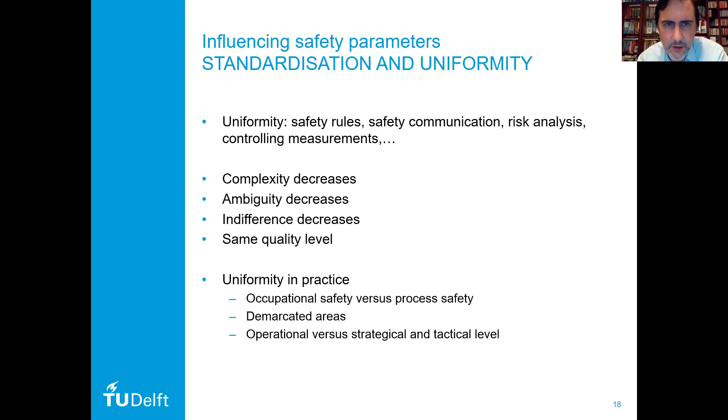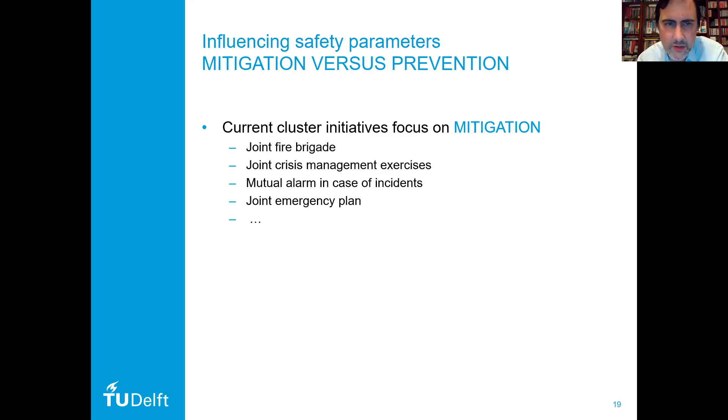Well, it's mostly operational. On the other hand, of course, it's mostly also reactive and not preventive. Because if we talk about mitigation versus prevention, cluster cooperation and initiatives currently mostly, or solely, focus on mitigation, on the reactive part. You have a joint fire brigade, for instance, in some clusters, or joint crisis management exercises, or emergency plans that's present, but it's of course reactive and operational. And to a lesser extent or non-existing, prevention.

Joint prevention, so exchanging information with each other in a uniform or standardized way, investigating accidents in a uniform way, jointly carrying out risk assessments or threat assessments, for example. These are all possible ways to improve cooperation with respect to prevention in a chemical cluster.

Laws and regulations, there is some kind of a paradox, because the government in the Netherlands and in most countries, they actually give incentives to companies to cluster. They like companies to be situated in chemical industrial parks and not as a standalone company far away between residential areas. So there is some kind of push to cluster on one hand, but on the other hand, once companies are clustered, from an inspection point of view, companies are still treated as standalone companies. There is no inspection at all, for example, looking at how companies cooperate, what is the quality of exchange of information, what is the quality of cluster safety with respect to chain effects, escalation effects, and domino effects with each other, and other safety issues specific for chemical industrial parks.

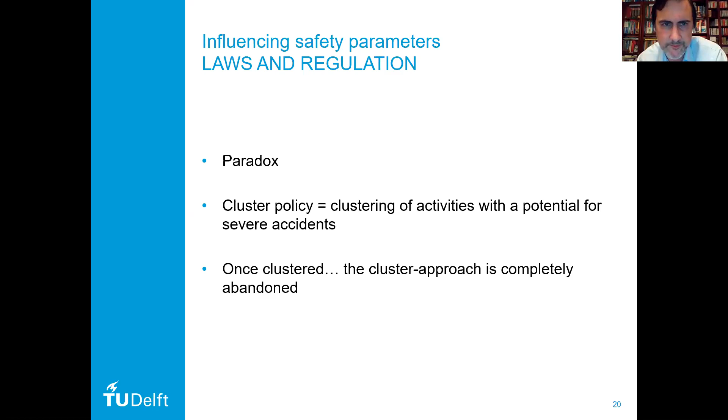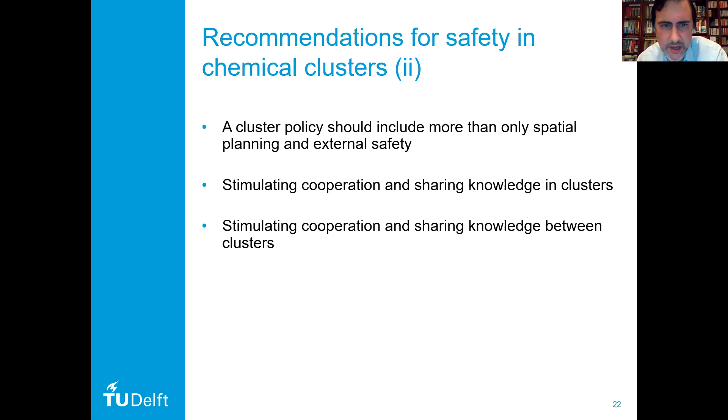Try to be more proactive and strategic in the cooperation within chemical industrial parks. A cluster policy should include more than just spatial planning and external safety. Cooperation should be stimulated and knowledge should be shared within clusters and between clusters, also between non-clustered companies, and uniformity initiatives should be given incentives.

So a little word about security. Of course, security was also part of the study. We also drew a lot of conclusions about security, which I summarize here in a nutshell. There is a difference between safety and security, because the worst credible central events are not the same for both, more or less, in the sense that, for example, in physical security, it's possible and even credible that multiple central events take place simultaneously. So the end consequences could be much worse.

Also, you have to take into account that the existing control measures now in place for safety reasons will not work in case of security, if they are intentionally disabled, for example. It's a little bit the same as with the presentation on Natech. You have a lot of barriers, but if the barriers do not work, take this into account in your threat assessments and possible consequences when you deal with security in chemical industrial parks, for instance. The influencing parameters are similar: collaboration and knowledge sharing, standardization and uniformity. They're all very important for security as well as for safety.